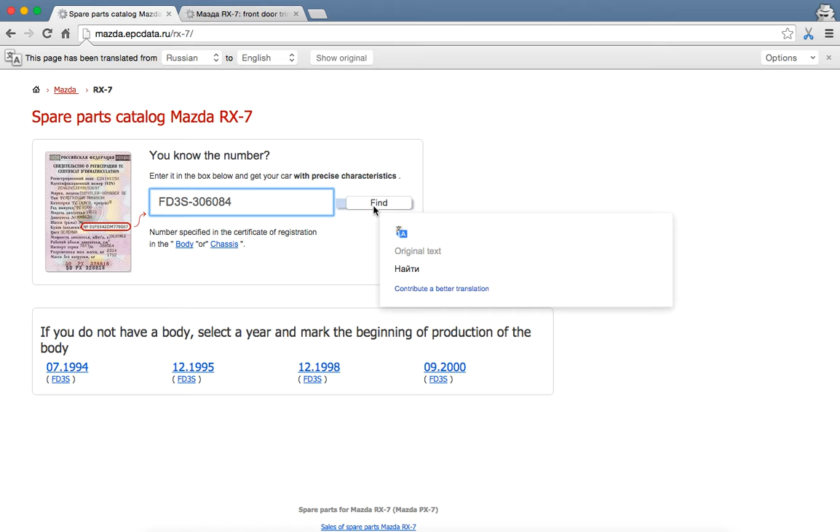So I'm going to do find here, and just watch the address bar, by the way. What you'll see is it adds this parameter to the end of the URL, frame underscore number equals my chassis number. And so that will automatically give me all the part numbers relevant to my year of RX-7.

As you know, Mazda changed some of the bits over the years, particularly for the later FDs. There's quite a lot of differences, so it's good to use your exact chassis number to make sure you're going to get the right part for your car. Obviously some cars have been changed over the years, and that's a whole other kettle of fish, but generally this is going to be the best way to find the bit you need.

Another cool thing about this, just because I'm demoing it and I think it's worth mentioning, you can actually use this EPC software to find out a bit about the specification of your car as it left the factory. So in this case, I can see it's returning some information here.

Now the translate hasn't come up, but I believe this is like the build date. So mine is dated 95. What else can we see? It came as a 5-speed manual transmission, had the limited slip diff. It gives the diff ratio and a few other things. It also mentions the type, so mine's a type RB or type R Bathurst. 3L is the paint code.

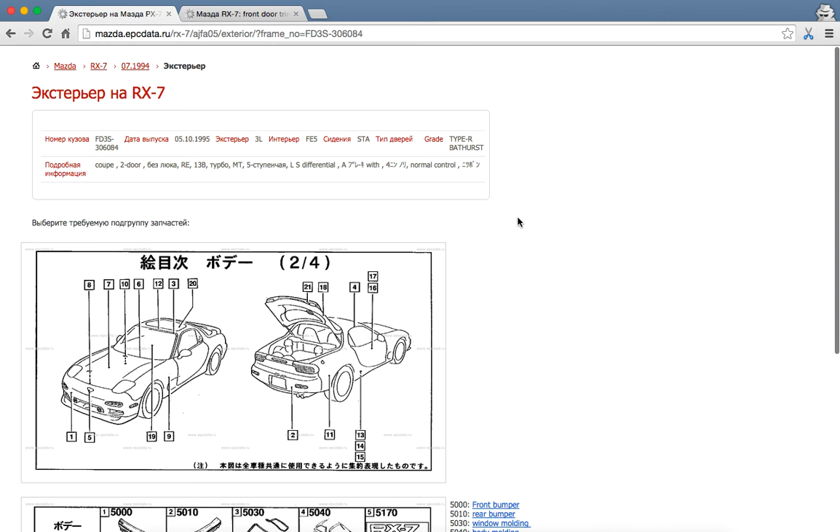So I'm going to go to the exterior section here, and it'll bring up a diagram. Don't worry if the picture doesn't match your car. If you enter the later chassis number, you might see this earlier-looking version of the FD, or sometimes even the FC RX-7 in the diagrams. I think Mazda just didn't update all of that in the EPC. Different RX-7 models were shown, but the part numbers should still be correct, so don't worry too much about that. I think the programmers just didn't get around to it.

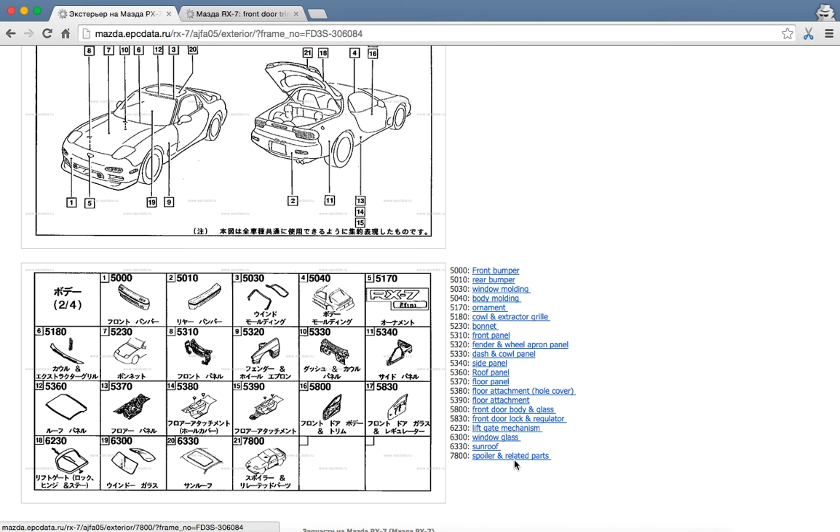So I said I was going to look for a rear spoiler. Looking at 21 here, down here I can see this number 7800. If I go to the right, we can confirm, and this part is actually in English, which is useful — 7800 is spoiler and related parts. So I'm going to click into that section, or you can click here as well, it'll take you to the same thing. I'm just going to click on this one though.

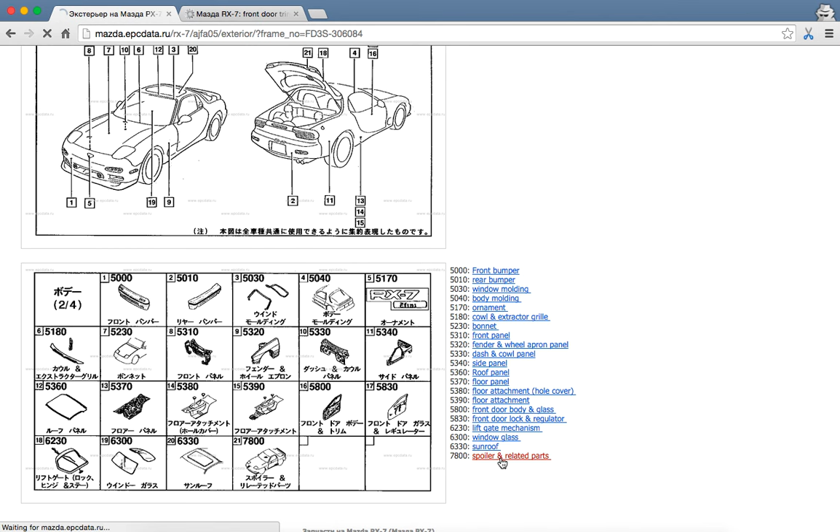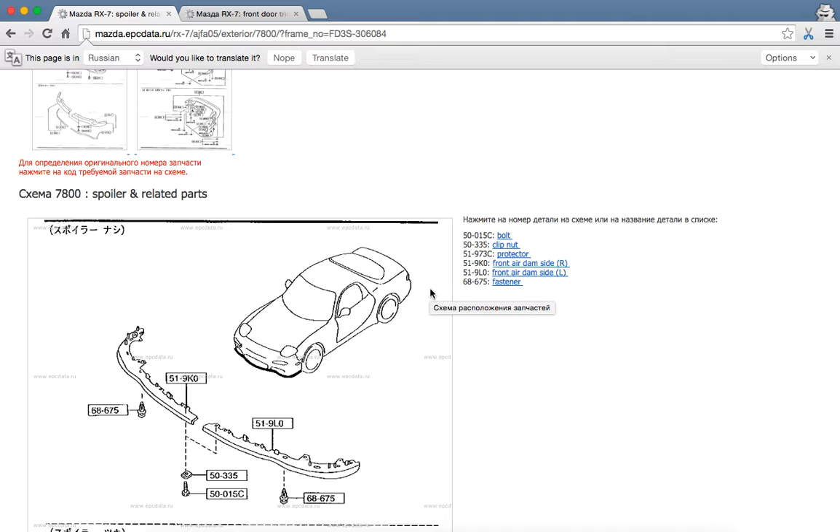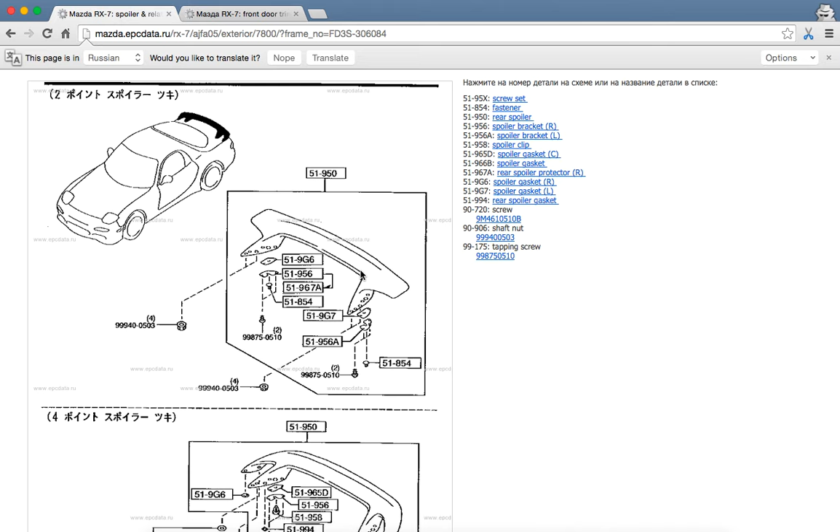I have to wait for this to load. This will give me a different exploded view of this section of the EPC. If I scroll down, here's my rear spoiler. You can see there are two different versions here. Just an interesting fact, I've seen some 95 models with the four-point rear wing, sort of like a Series 7 as they're called — the rear wing that came on the 96 to 98 models, but I did see them in late 95 too, so that's probably why it's shown here as well. So this is the later style one, or the in-between — I don't know, the Zenki, Chuki, or Koki, the Japanese way of referring to early, mid, and late models.

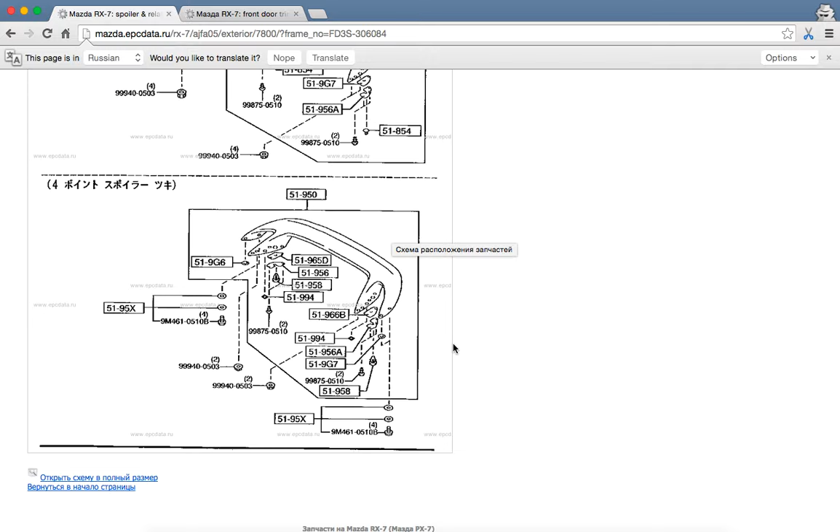What I'm interested in is this particular rear wing here. Now what I have to do is try and figure out the part number for this rear blade. It may actually come as one entire assembly. 51950 is the number to look up. 51950, I am blind.

There it is. Clicking on that will give me — and this is interesting to know — the part number. There's a couple of different ones given to me here. I think it's saying the different specifications, like type RS, type RZ, that sort of thing. What's also cool is that it contains 3L, which is my paint code, so if your car still has the original paint code, you can potentially order the right color-coded part. I don't know if Mazda is still doing that, it'd be a bit of a hit and miss affair I'd imagine. But I can also see there's another one here for the Type R and Type RB, so that's probably the part I need.

Now, this part of it is the actual part number, and the 3L is the designation for the paint code. So that would be what you'd give to your dealer.

Now I use a site here, Amayama, sometimes to look up these different part numbers. Hopefully it's up — yes it is. Slow internet, unfortunately. Oh, come on, okay.

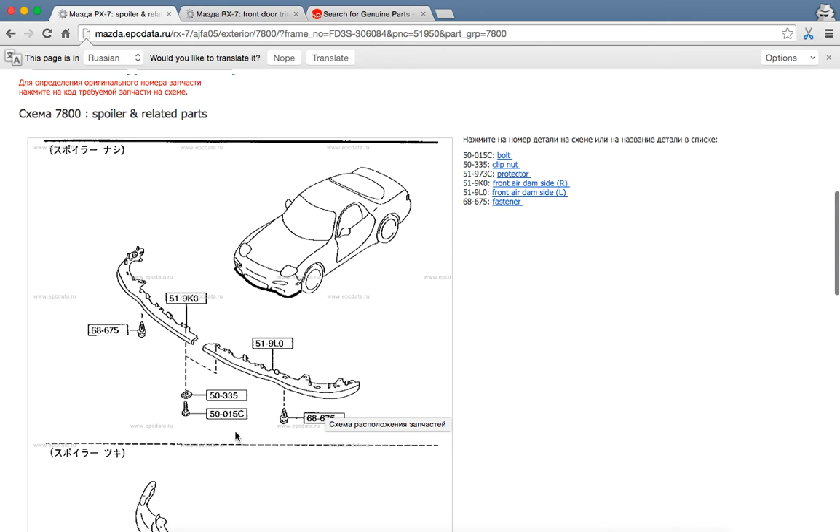What else can I show you? So let's say I wanted to find, on the front lip spoiler, this particular part - not a wing nut, but a clip.

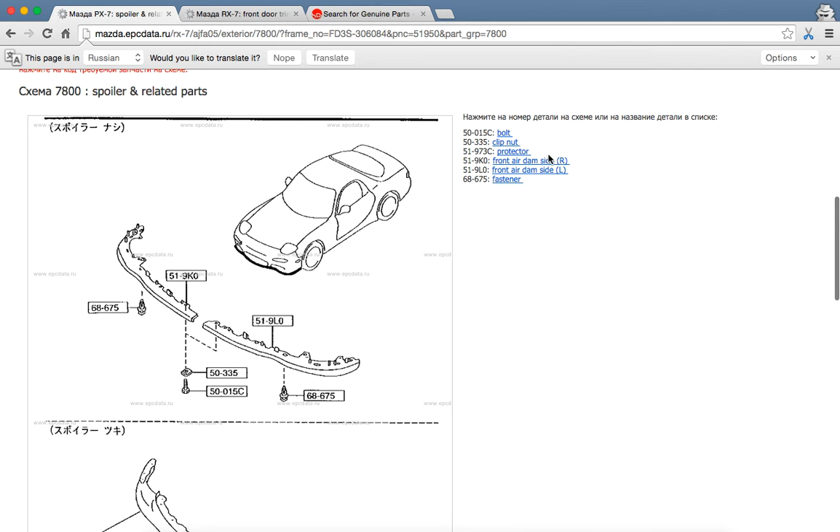Part number 50335. It does give a description here - clip nut, though it's probably lost in translation along the way, so I can't recall exactly what this is for. I'd have to translate it, but I think it says you need 10, so there might be 10 used on the front lower lip - you don't have to order all 10 though.

We can see that for one, it is $1, so I could theoretically add 10. I think that's what the EPC is telling me - there's 10 used, so if you wanted all of them, that's how many are needed. That saves you counting them all up one by one.

That's pretty much the process for finding any parts. The trickiest part of using this is really just finding the right section of the EPC for the part you're looking for. Sometimes things aren't kept under the taxonomy structure you'd expect, so it's sometimes just a case of trial and error, trying different sections.

To go back, you've got these breadcrumbs here that will help you. One other thing to notice is that my frame number parameter, this URL parameter, is on every page, and that's how the web-based EPC knows to return information for my particular car, no matter what section I'm in. So if you didn't add it at the start on the logbook page, you can add it at any section - you can see it's persistent in the URL no matter where I go.

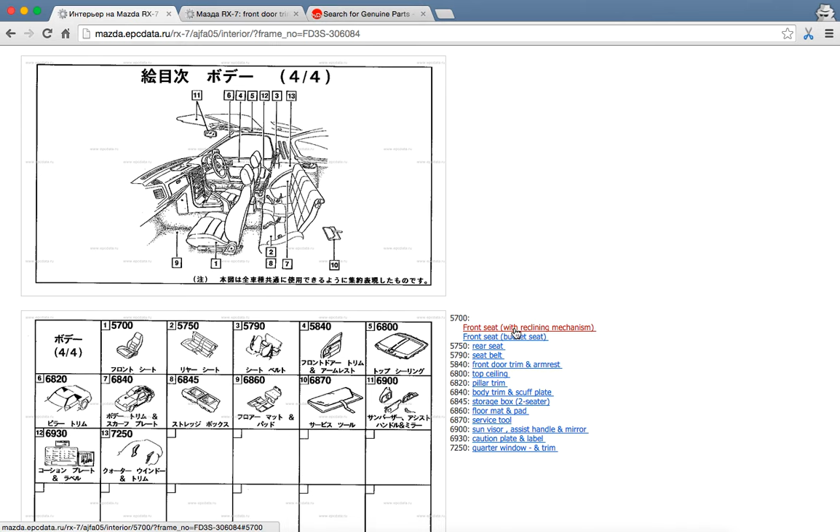If I go into, let's say, the interior section - here's a good example. This is the FC RX-7 interior, so even though I'm looking for FD parts, it's showing me the FC. Let's say I was looking for a seat - look up number 1, 5700, front seat with reclining mechanism.

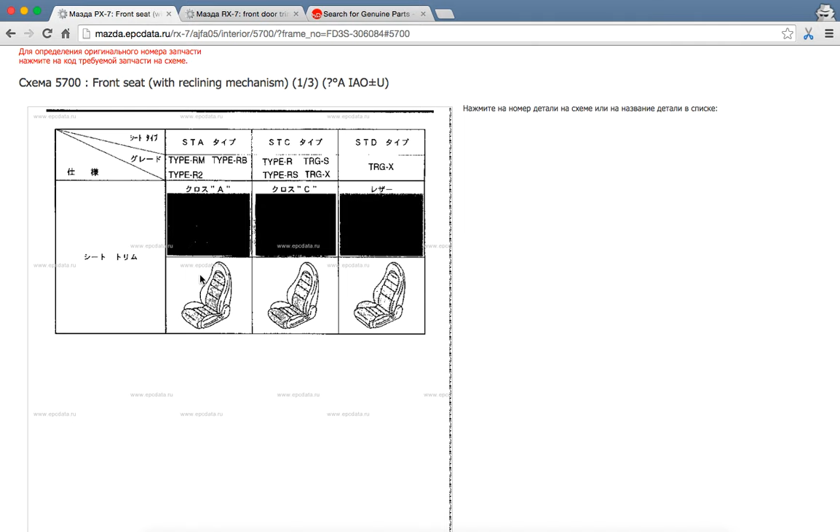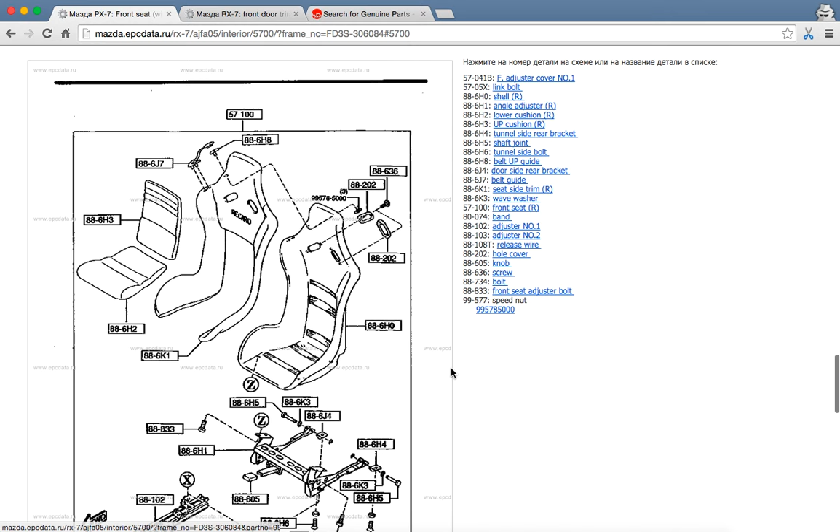You can see there are a lot of different options in terms of trim - whether they were a suede seat or had that carbon finish, which is what my car originally had. If I scroll down, I can find the much loved Recaro RZ seats. In the past I've often used this EPC to find parts for these because it's really hard to get parts through any dealers.

This gives us an exploded view - you can see the entire seat rail. You'll have to price them up on your own; they are hideously expensive, along with the cushions. But let's take a cushion here, or even the outer fabric, because often these wear in terms of the outer fabric over the years, so it's really hard to find a good pair.

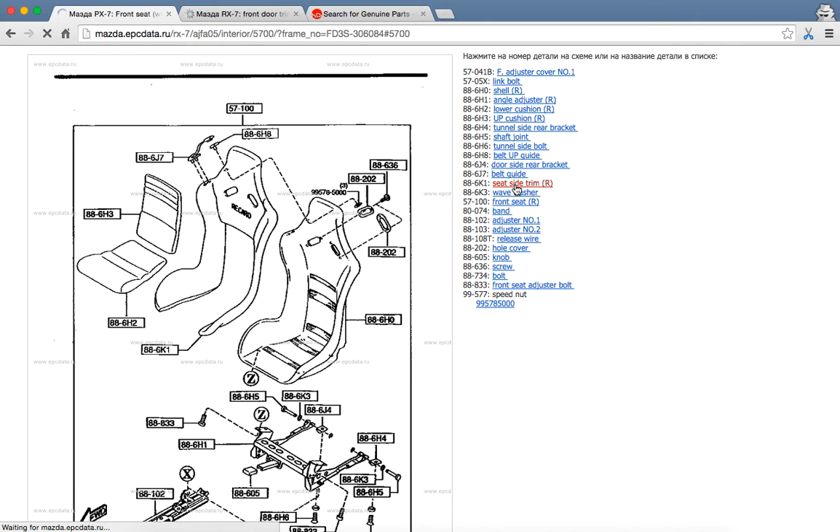Part number 886K1 - side trim, yep, this is on the driver side in a Japanese market car. So I have this part number, and I'm just going to look up the price - prepare to have your eyes water a little if it comes back. Yeah, so $1,000. They are available, but they cost a shit ton.

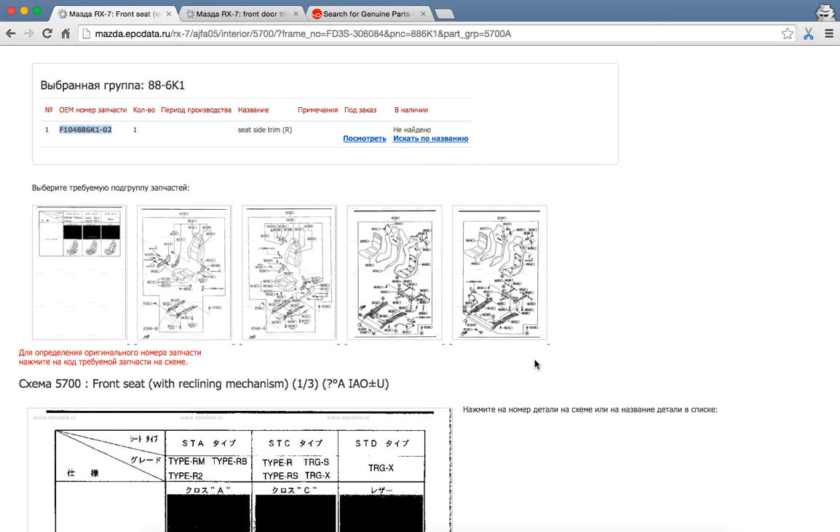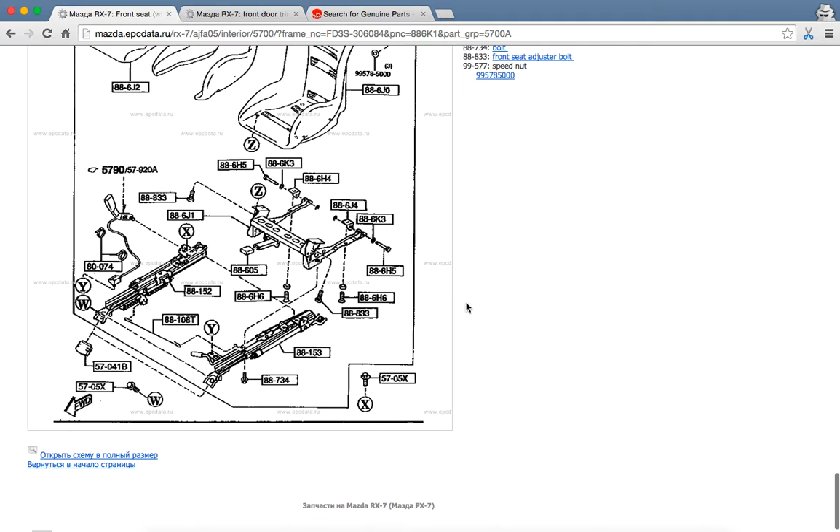That's sort of, I guess, probably too long a guide to how to use this thing. There are other sections with fasteners and stuff - you can get into the fasteners themselves.

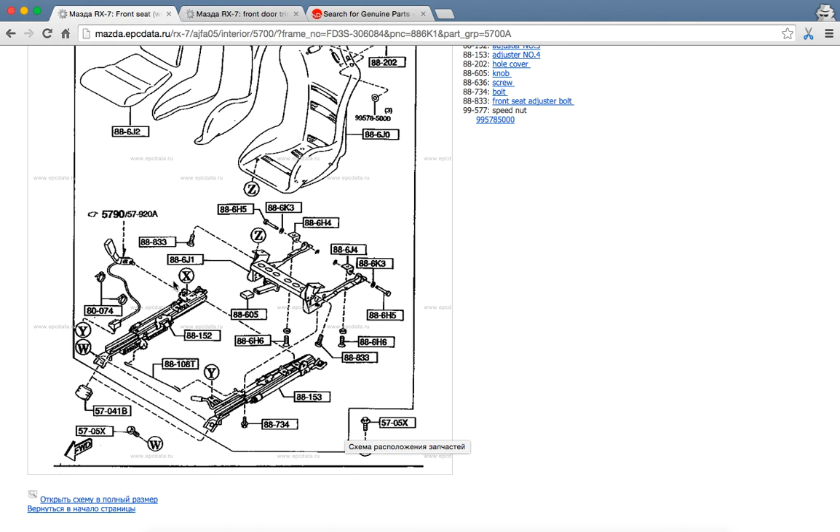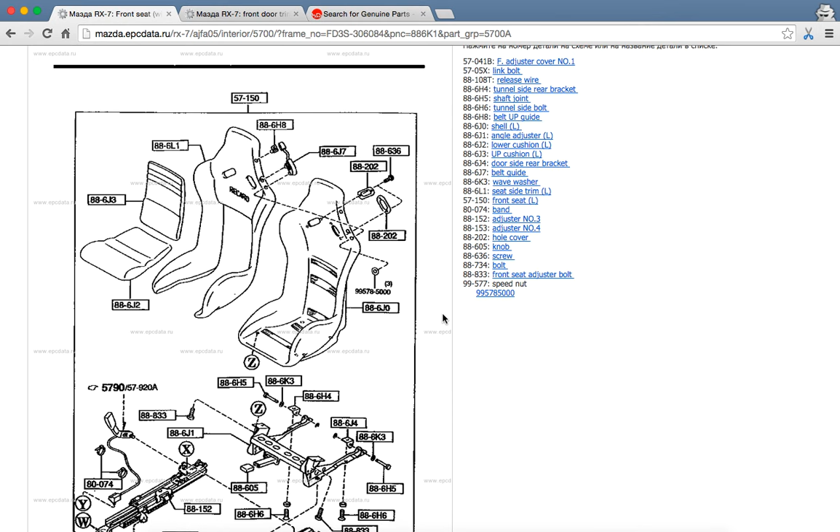There are different codes, like this X and this W mean different things, and the Y too - I think that usually means location, so if you're reading this, you can see this X bolt goes into the X location here, and this W goes here. There are little subtle nuances like that you might have to get familiar with when reading this EPC. Like this washer here, you follow the diagram and it goes to the underside of this seat belt clip. These are quite useful once you know how to read them, but it can take a little while to get familiar with it, and by studying it, you can pick up a lot.